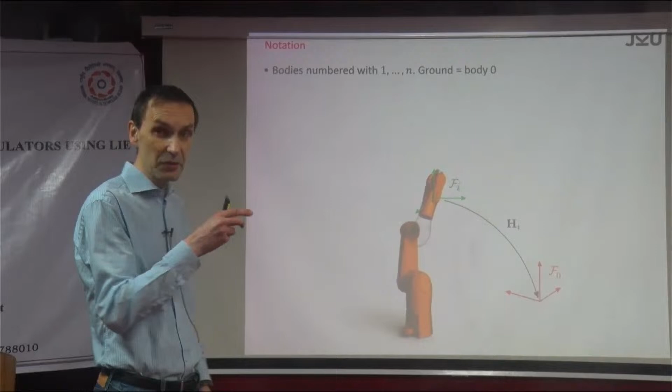Okay, good. Then let's go, without further ado, into what we are talking about. So, just remember, what was this matrix? How do we describe rigid body motions? In a sense, we're saying that any rigid body can be represented, kinematically at least, by a frame, right? Haha, because you haven't been here. Let's see. Take this as a recap, maybe.

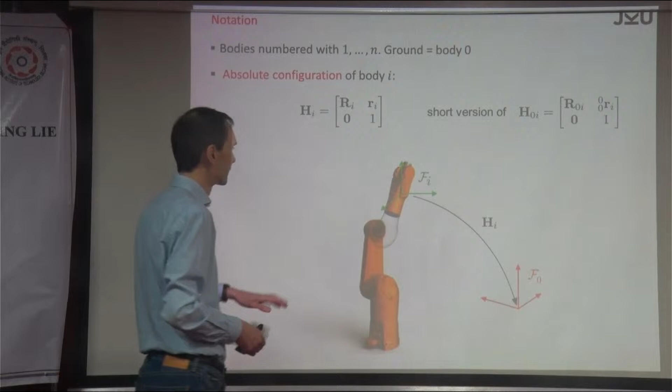So you know homogeneous matrices, right? Cool. And what is it doing? A homogeneous matrix transforms point coordinates, essentially. But on the other hand, it actually describes a 6D kind of transformation, because it says one frame relative to the other frame is translated somehow and oriented somehow. This is encoded in a rotation matrix and a displacement vector. I guess I don't have to recall this because you know this.

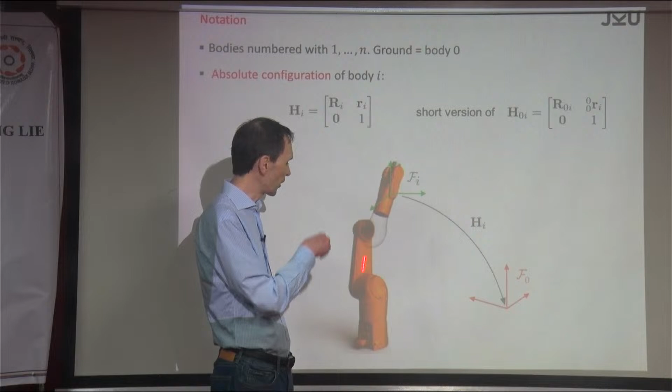Okay, so now let's say we have a robot, like an open kinematic chain for the time being. And what we're interested in is the last link. This was the last example we had yesterday. The forward kinematics, as they call it, says I would like to have the end effector. So here is an end effector frame. There is a frame attached to all of the links, but let's say this is the last one. In this case we have 6, so this would be F6, attached to the end effector here.

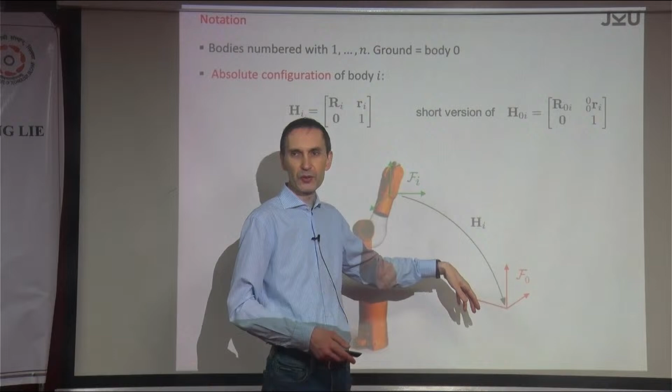And the question is, how is this end effector frame positioned relative to the world fixed frame? Because we have one frame that is fixed to the ground, and this is also link number 0, if you want. So this is the question. Of course we use a homogeneous matrix, and the notation we introduced yesterday is H. So H_JI, for example, is the transformation from I to J. For our case now, we are interested in what we call the absolute pose, and pose means position and orientation, right?

So the pose of a frame relative to the inertial frame. Whenever we refer to the inertial frame, which means that we have index 0 as the beginning, we just omit it because that's much easier. The 0 we can drop. It's always like this. Maybe notation, because you haven't been here yesterday at this time.

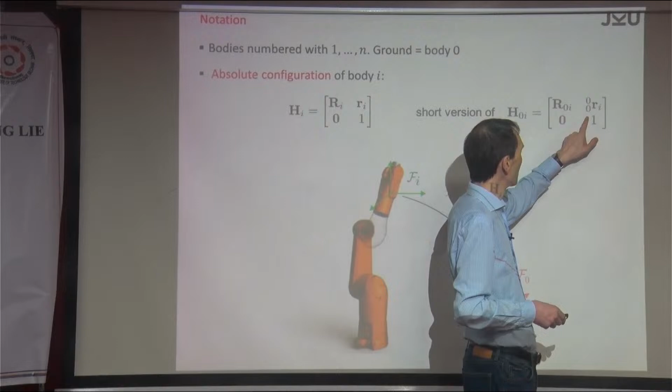The notation goes that we have a vector, right? And the vector measures from 0 to I. So this is the source and the target, okay? And then we have, of course, the leading superscript here, which is indicating the frame in which we are representing the vector. So this is essentially it.

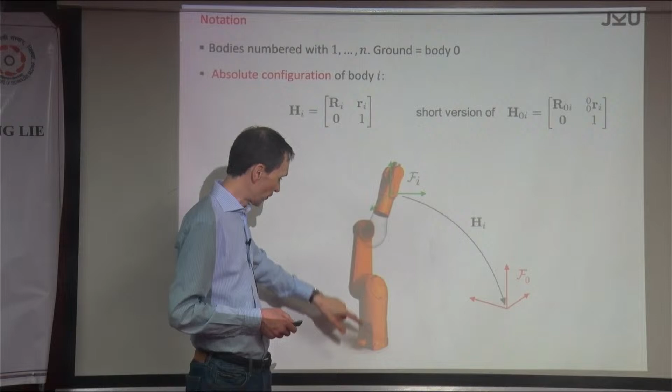Okay, now the question is, what can we do with these exponentials? And that's what we're going to look into today. First of all, we have to say something about relative configuration. So when you take one of these matrices, let's say I'm interested in the pose of link, I don't know, 3 relative to 2, for example, right? Or 6 relative to 2.

Then it's easy to do because essentially what you're doing, you combine these transformations. And maybe it's good to understand or to recall what it actually means. So what is Hj doing? Hj transforms, this was the definition, from frame J back to F0. Then Hi does, of course, the same, right? It goes from I to 0.

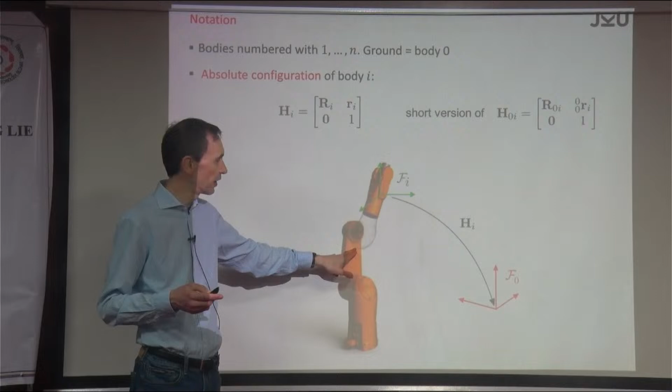Maybe we should have a picture of it. Hi goes from I to 0. Hj goes from J to 0. Now, in order to go from I to J, you just go from I to 0 and then back to J. And when I say go back, that means taking the inverse of the homogeneous transformation, okay? And that's exactly what we have here.

Now, if you go the other way around, from J to 0, from 0 to I, then you take exactly this. And always you have to read it from right to left. This is what I said for the rotations also, because you are transforming coordinates, right? This goes from J to 0, and that goes from 0 to I. So altogether it goes from J to I, okay?

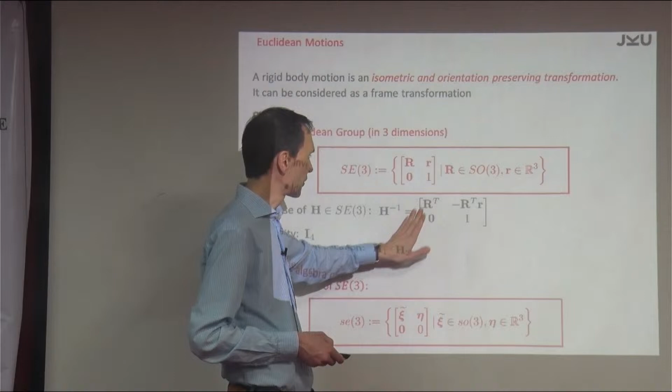So if you look at what we had yesterday, just to recall the inverse: the good thing is for these 4x4 homogeneous matrices, there's a closed form of the inverse, okay? And the inverse matrix looks like this. We have the transpose, minus this thing there. And if you now plug it into this formula, take the inverse and multiply these matrices, what you get is hopefully obvious, exactly what you would expect.

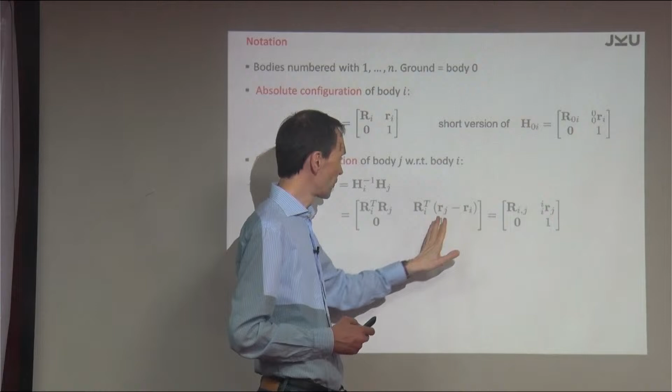What you get, for example, for the displacement is simply the vector from I to J, right? Represented in which frame? In the I frame, right? Because R0i transforms from I to 0, but the transpose goes from 0 to I. So these are expressed in the space fixed frame, and then you transform it back to the frame I.

And this is, of course, the relative rotation from J to I. So essentially, in Hij we have Rij, and of course, the displacement from I to J. Not complicated, I guess. So the important question now is, again, what about this exponential mapping? How can we use it?

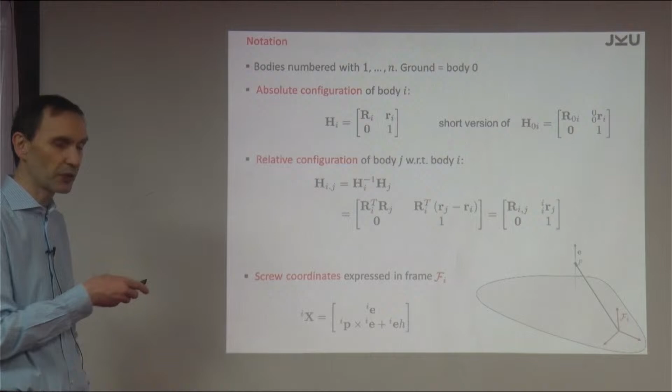What you could say is that, of course, there is a screw coordinate vector that represents this relative motion, because we had the Chasles–Mozzi theorem yesterday that says any rigid body motion is a screw motion, right?

And then we concluded that, okay, if this is so, then we can have a screw coordinate vector that we plug into the exponential so that we get finally out the relative motion, right? The finite motion we get via the exponential from this screw coordinate. Okay, this was the justification.

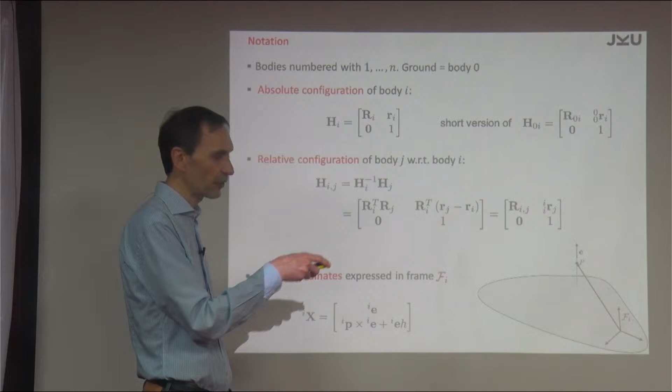And now the screw coordinate always has a form like this, right? So, just to repeat it, we have this unit vector that goes along the screw axis, and yet we don't know the screw axis, but there's always a screw axis. So again, this is the unit vector that goes along the screw axis, and then we need a position vector, a vector to a point on the axis, and it could be any point.

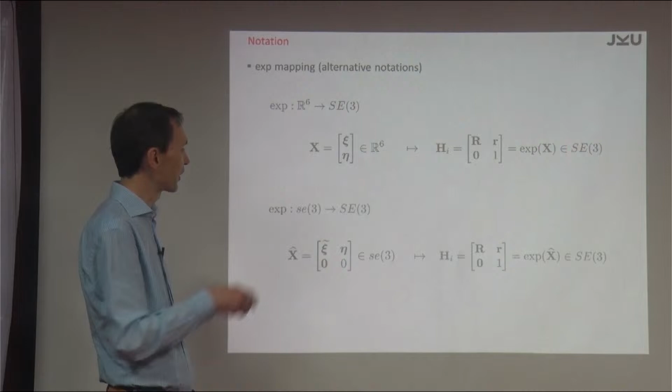And if you plug this into the exponential, what we get is the motion of the frame relative to which we are measuring actually the screw coordinate, right? So this was the basic idea. And how we did it actually, so these are the screw coordinates. So if you call this xi and this eta just for simplicity, then you get out the homogeneous matrix by plugging it into the exponential. Okay, this is good. So now be more specific.

And I guess I have to maybe increase the size. That should be okay.

So it's bigger. Okay, so let's now look at our systems. We have a kinematic chain, right? So a kinematic chain is essentially, as we defined it yesterday when we looked at the topology, a sequence of links or bodies connected by joints. And look at this very simple example. It's always the best example. Have a revolute joint, for example. So we have body i minus 1 and body i. They are connected by joint i.

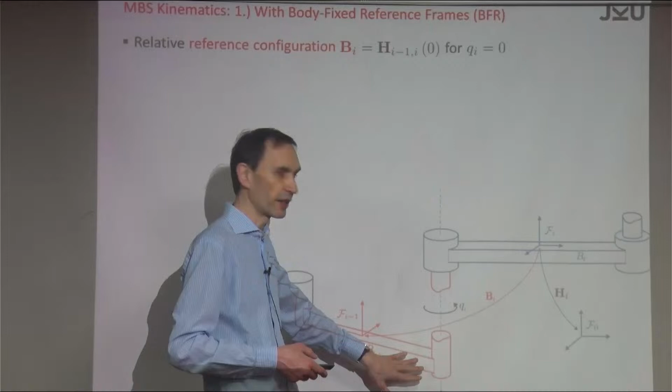It's always like this, because when you have an open kinematic chain, you can number them starting from 0 for the ground, and then 1, 2, 3 to n, and then link i is connected to its predecessor by joint i. You can always number them. That's why body i is connected to its predecessor by joint i. Okay. Anyway, so what can we do?

As we said, any link, any rigid body is kinematically represented by a frame. So we are attaching a frame. So Fi is actually representing the body i. And of course, you have the same on the body i minus 1. This is the blue one, this is the red one. So this is the predecessor of Fi. I'm interested in, as we say, the absolute pose, which is Hi, the homogeneous matrix that tells you how this frame is positioned and oriented relative to the spatial frame, which we call the pose of the body. And this is Hi.

Now I'd like to express this in terms of an exponential. I know that this is a revolute joint, for example, or it could be any joint. Not any, but we are going to see which one. But for all of the technical joints, we can have an exponential mapping.

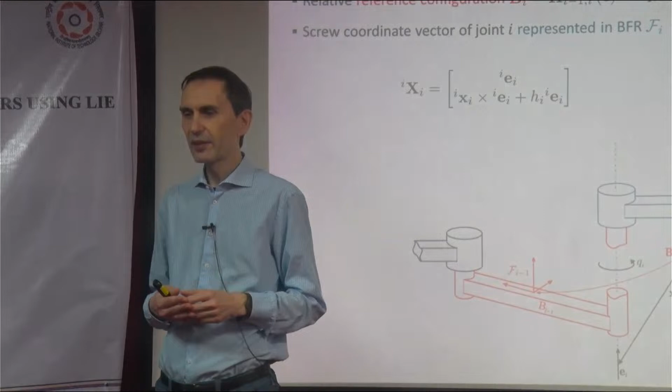Yesterday, I owed you one formula because there was a question by you, I guess. What if you have a prismatic joint? Then we said, mathematically, this is an infinite pitch. But the formula looks different for the exponential. It actually looks much simpler. Anyway, this is what I still have to show you. So this is the general thing, and that's it. Good, fine.

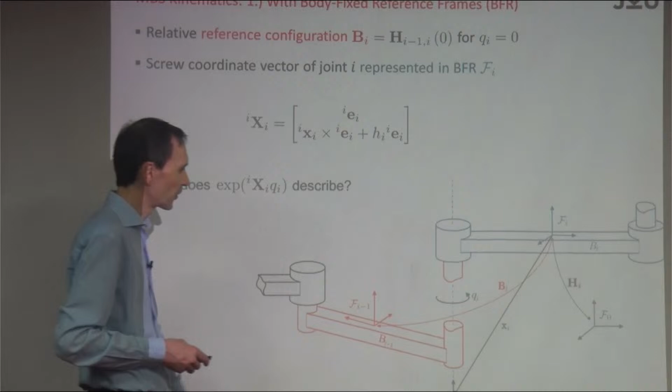And what? I plug it into the exponential, but if I plug this into the exponential, what does it actually describe? What does the exponential of this screw coordinate tell us? First of all, look at this one. I didn't talk about this. What is the exponential of the screw coordinate defined in this way telling you? So when we introduced the exponential mapping, do we have it somewhere? Maybe from yesterday? Yeah, maybe it's here.

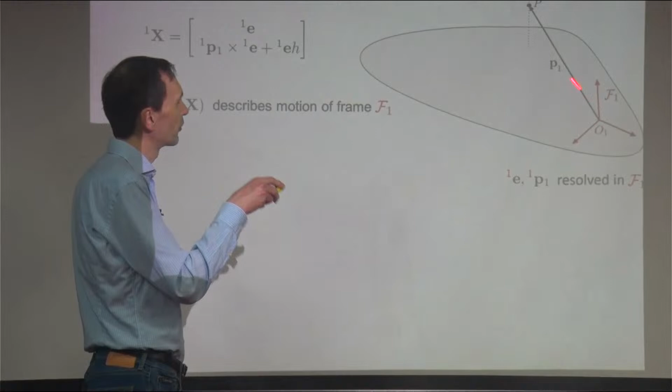So there was one question yesterday. We have two frames, right? And I tried to describe the relative pose of the two frames by using an exponential. But essentially, it's only one frame that we're looking at. Why? Because this was how we introduced it yesterday. You have one body, one frame, and we're interested in the motion of that particular frame. And we know it's a screw motion because any motion is a screw motion. So there is a screw axis and so on. All this was already told.

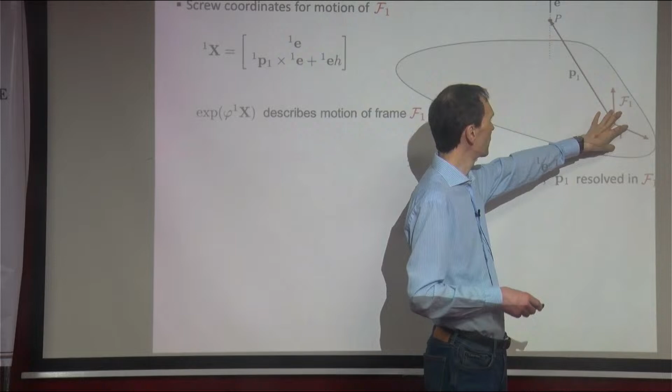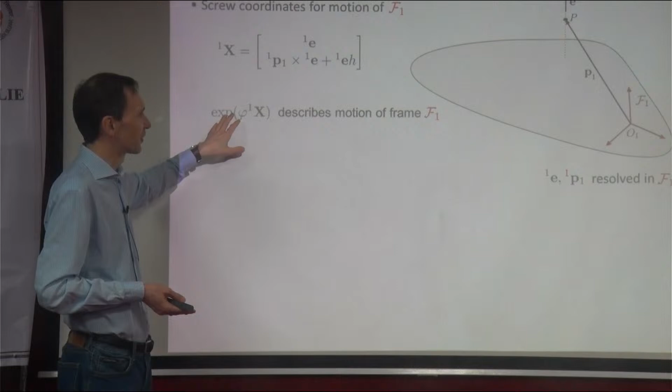But what is the exponential giving you? It's actually describing how this frame is displaced, how this frame is moving according to the screw motion relative to where it started from. So that's why we essentially have one frame, but there are two instances. And obviously, what is the exponential of the argument 0? Well, it's the identity, right? So if you call phi the angle, this frame F1 is exactly located where we start from. Now, if you start doing the screw motion, then it displaces.

And what we're getting is the homogeneous matrix. This X gives you the homogeneous matrix that describes the pose. Imagine this is now rotated, so it's somewhere here. And this H actually describes how you transform from the displaced one to the original one. So essentially, look at the frame, define screw coordinates, plug it into the exponential, and what you get out is the homogeneous matrix that transforms from the current back to the original. And that's the only thing you have to understand.

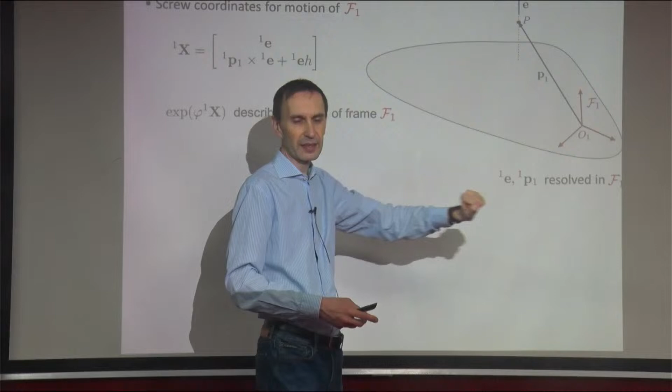And this probably answers this question here. What does this exponential describe? It describes the motion of this frame, which we're interested in, but not relative to its predecessor. It describes the relative motion to where it started from. So let's say this revolute joint starts to turn, and if it's positive, it goes somewhere in the back, and then the exponential tells you the homogeneous matrix that transforms from the displaced one back to the original one.

Okay, good. But this is not what I wanted. What I wanted is actually the displacement from here to here, or the other way around. But that's easily done because I just have to pre-multiply it, right? Because this is how the BI comes in. The BI is again a homogeneous transformation matrix that is transforming from, let's say, what they call the zero reference configuration.

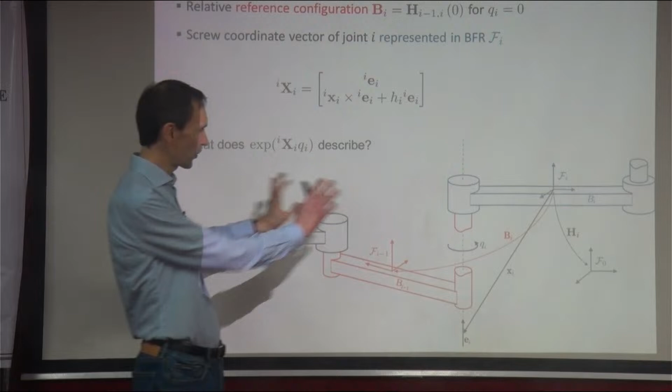This is our snapshot of, or let's say, the CAD drawing, for example, if you have your drawing of a robot or something, right? This is your reference configuration. You say, okay, this is when Q is 0, all the joint angles are supposed to be zeros like this, then this is the reference configuration. So in this reference configuration, you can define this B. This is constant because it's reference, right? Zero reference. The B describes Fi relative to Fi minus 1 in the zero reference configuration.

Okay, that's nice because then the only thing you have to do, you have to transform. Yeah, it would be nice to write actually, because if this joint has been moving, this is displaced somewhere, right? And just imagine, so this is displaced somewhere. So the only thing you have to do, you have to combine the transformation from the displaced one to the original one, the reference, and then of course from the reference to the predecessor. And that's all you have to do, right? And that's why the only thing that you have to do is probably to combine them.

So if I want to go, look at the last one. If I want to go from Fi to Fi minus 1, then eventually the final relation that you have is this exponential that tells you how this guy is actually moving relative to where it started from. And then followed by the constant transformation due to the initial displacement of Fi minus 1 and Fi. And this is the Bi, okay? So this is essentially this one.

Now, if you have a long chain, you have the chain consisting of, I don't know, I bodies in this case, or I joints, then you do the same. So this is this, and then the same applies, of course, to the predecessor, Fi minus 2, right? So the same story goes. And then you go up to the first one, and that's it, okay? And there we go. And that is actually the so-called product of exponential formula for the kinematic chain. And that's a famous formula that goes back to Brockett, and you find this in all these kind of modern robotics books and so on.

As I was saying yesterday, first of all, this is a nice expression because it's very compact. Secondly, the parameterization is pretty simple. We talked about the DH parameters yesterday. The DH parameters are as they are. They're kind of complicated because you are restricted to a certain notation, to a certain convention. Okay, but what do you need here? So if you believe me that this makes sense, then what parameters do you need to parameterize the system?

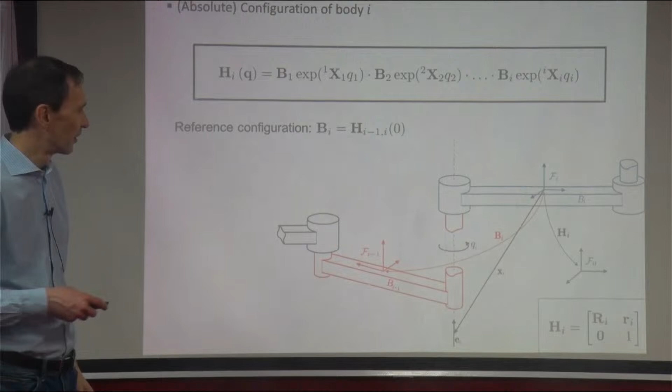Instead of the DH parameters, for example, the only things that you need is exactly what goes into the screw coordinates, which means you have this xi and you have the unit vector. And that is something that you can easily define, or that you can easily measure, because when you have a robot, you know the axis, right? And that's it. You have to know the joint axis, and then you get the unit vector, and then you can easily measure a point on it. And that could be any point. I'll give you an example later on.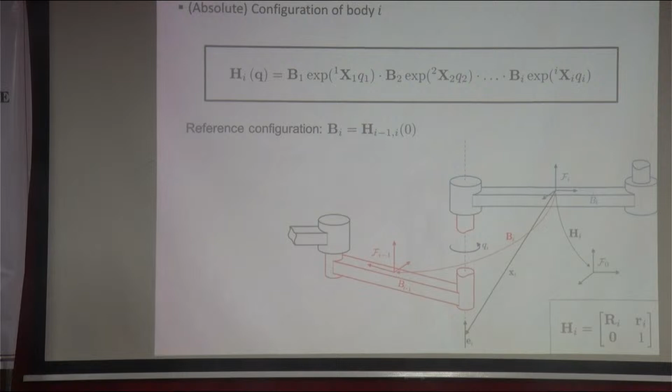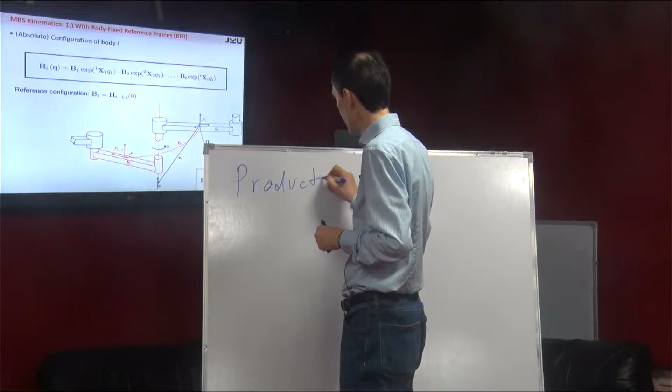Okay, so now we are here, probably too fast, but anyway, this is a high-speed introduction to this. And this is a formula that you find as the product of exponentials. I should have this mentioned somewhere actually, because this is an important name, because when you go to any of these robotics conferences or look at these books, this is what you find. So it's called the product of exponentials. And this goes back to Roger Brockett, who is a kind of famous roboticist. Exponentials. And it's always abbreviated as POE.

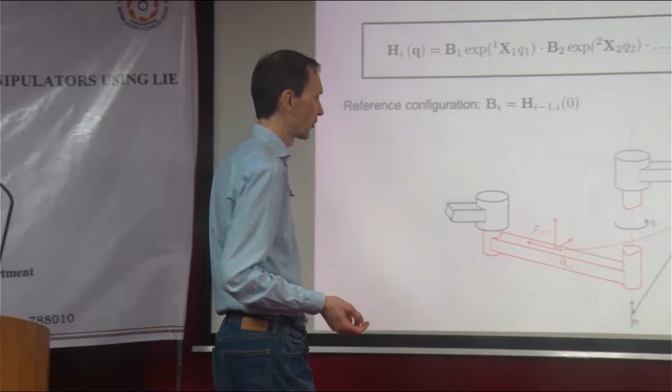So if you search for POE, you find a lot of papers working on so-called POE formulations. And the good thing is that you can use it for calibration, for example, for identification, right? Because robot calibration, what is it all about? It's about identifying these parameters correctly, because if you buy a robot, you have certain DH parameters, for example, or certain geometric parameters, but of course the system that you bought is not perfectly like this. So you have to identify, you have to calibrate these systems, and this formula is also helpful in this. Why?

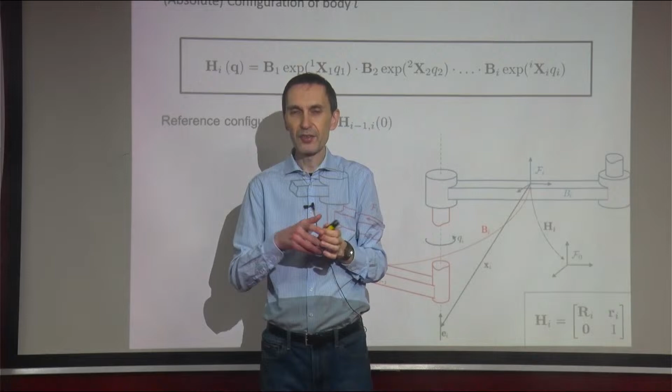Because what is it then? I mean, what does calibration mean? You're interested in sensitivity. You're interested in how actually this formula would change if you slightly change these parameters. It's always like sensitivities, right? Sensitivity: you have a function, or some relation, and you are interested in how sensitive that function is to changes of the parameters. And what do you do? You take the derivative, like a total derivative, right? Like this.

And now the good thing is, and this is what I said yesterday, what's the good thing? Why are people in system theory so keen on using exponentials for solutions of differential equations? Because taking the derivative is pretty simple. If you take the derivative of this formula with respect to q1, for example, what do you get? You get the exponential again, because exponentials, if you take derivatives, they repeat, right? We will see this when we go. Okay.

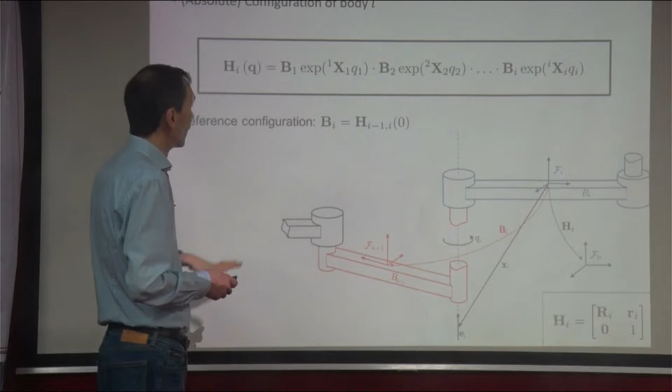Okay, so messages. This is, first of all, a compact form. This product of exponentials is very compact. And secondly, the parameterization is straightforward, because it's also called a vectorial representation, because you only need vectors e and x instead of super complicated DH parameters that you have to introduce and so on. But we can make it even better, in the sense that we can actually get rid of the need of introducing body fixed frames.

And how does this go? Essentially by saying, screw theory is coordinate invariant. That means that you can actually use any frame to express screws. And why don't we do this? Why don't we just say, okay, I'm actually using the space-fixed inertia frame to define the screw of the joint. It's the same, right? So what did we do before? Before we said we are defining the screw coordinates relative to the body fixed frame, because I'm interested in the motion of the body fixed frame. Okay, that's one way of doing it.

But we can also say, let's introduce the screw coordinates relative to the space fixed frame. Sounds a bit strange at the beginning, but why not? So just do it. You have the unit vector again. It's all the same concept, just a different reference frame. So now the unit vector and the displacement vector, the vector to a point at the axis, now we call it y. Before it was x, now it's y. And you measure this again relative to a space fixed frame in the reference configuration, where everything is 0, you measure the point and the unit vector relative to the space fixed frame.

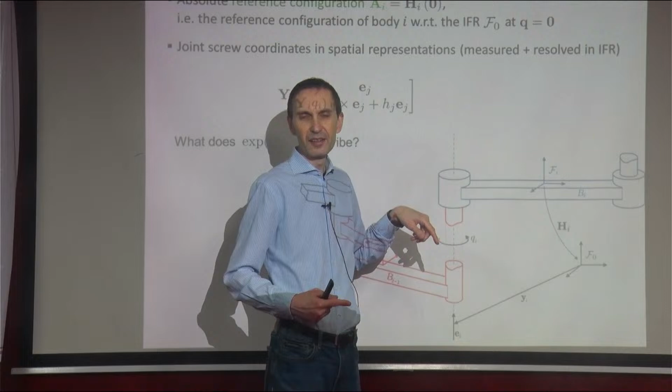It's correct anyway. So the correct sentence would be, it tells you how a copy of the inertia frame would be moving, right? And that's interesting, because you just have a frame, and then we say, okay, what happens if we have a screw motion? How would this frame be moving? And that is exactly what it tells you. It tells you how a copy of this inertia frame, this space fixed frame, would be moving.

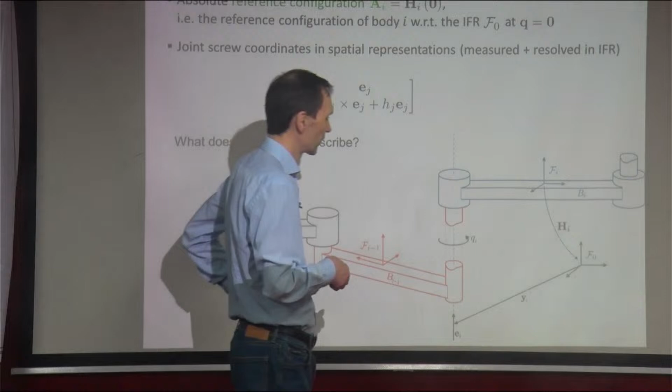Okay, that's nice. But how does it help me to actually say anything about the kinematic chain? Well, it's the same story, because the only thing you have to say is, okay, I have to relate that relative motion to my zero reference configuration. And that's all you need. And oops, how was it going? And yeah, we didn't have this yet. And that's exactly what you do.

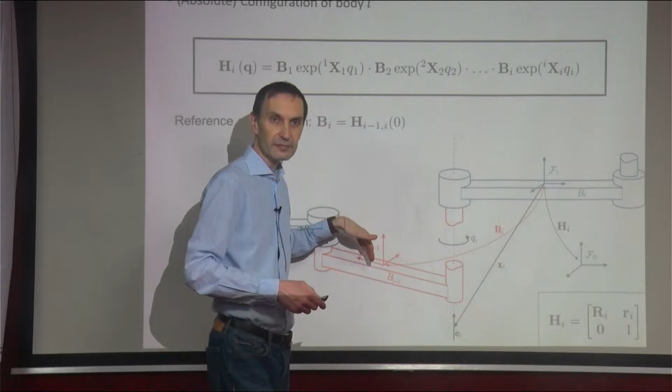Now what you do, you combine all these motions of the joints, because now you don't have an intermediate as we had here. You don't have an intermediate kind of fixed displacement, because everything is now relative to the space fixed frame. That's why you just combine them, and you can just multiply them together.

So if you start with i, the motion of this frame is according to this joint, the exponential of Yi. Then, because it's all referring to the same frame, you can just multiply it. Then the joint i minus 1 is doing something, in particular the exponential of Yi minus 1, and then you go up to Y1, and that's it. So then you have essentially described what happens to the inertial frame due to the motion of all the joints.

Eventually, I'm not interested in the motion of the inertial frame. So I finally have to relate that motion to what I'm interested in, the motion of this frame. And that's pretty simply done, because I know how this guy is moving because of all the joint motions. But what I have to do before is relate it to the initial pose of Fi. I take this Hi at the beginning, Hi0, and I call it Ai. So Ai is the absolute initial reference configuration.

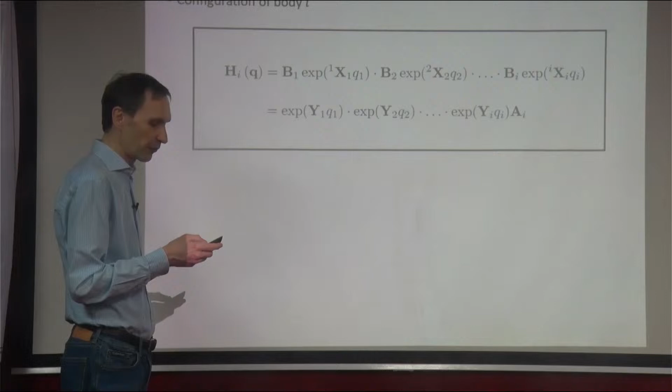And there's of course one application for this when you look into the forward kinematics of a robot. So what's the forward kinematics of a robot? The forward kinematics is essentially saying, I give you the joint parameters, like the joint angles, and I would like to know the pose of the terminal frame, the last one of the robot. And you don't need all these body fixed frames because they don't appear in the formulation here. That's why people use it for the forward kinematics very often.

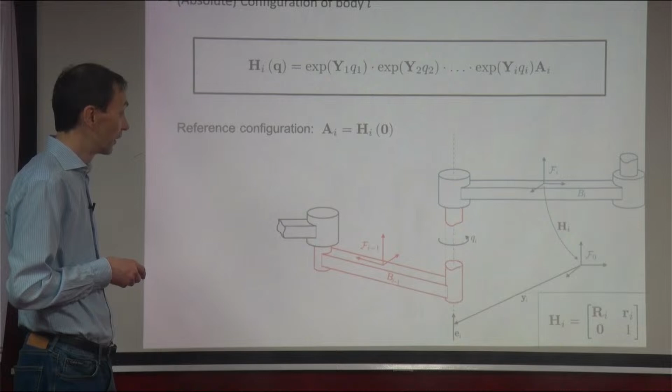Okay, now I had this simple example of a revolute joint, which is always good to analyze, or let's say a screw joint because it could have a nonzero pitch. But generally you have other joints. You have universal joints, Hooke joints, spherical joints like ball socket joints. There are planar joints. And you can of course generalize this because the screw coordinates can be combined. You can have multiple screw coordinates for a joint with multiple degrees of freedom.

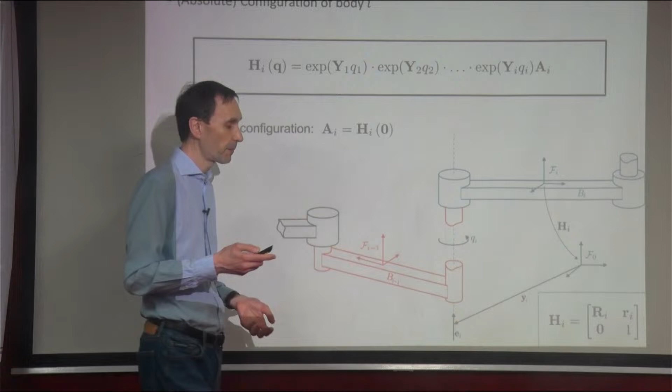And how do you do this? And for which joints does it actually work? There's a name, lower pair joints. I'm not sure if you mechanical engineers have heard about it. Aha, good. So a lower pair joint, also called a Reuleaux pair. Reuleaux sounds French, but he was a German kinematician. And for all these lower pairs, you can express the joint motion as a screw motion.

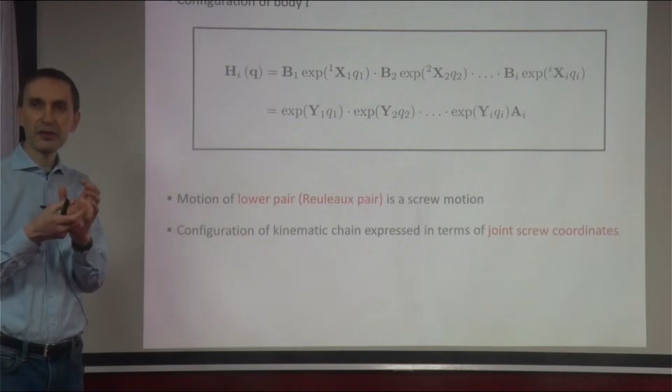Yes, this is what I was saying. Actually, what is a Reuleaux pair? What's a lower pair? A lower pair is very simple. It's a kinematic joint. What's this? Come on. Where am I? A lower pair.

I don't see any. Do we have a definition here? Features to blah blah blah. Yeah, so a lower pair. There we go. A lower pair is actually a joint that is defined by surface contact. Right? So surface contact, like a revolute joint. A revolute joint is defined by surface contact. You have a cylinder, you have a hollow cylinder, and they have surface contact.

Then you have the prismatic joint. It can look like this. Then you have this, they call it cylindrical joint, because this is 1 degree of freedom, right? That's a prismatic joint, 1 degree of freedom. The cylindrical joint is a combination of both, right? So you can slide and you can rotate. And again, this is surface contact. And then you have the ball and socket or spherical joint. Again, you have a surface contact. Everything is defined by a surface contact.

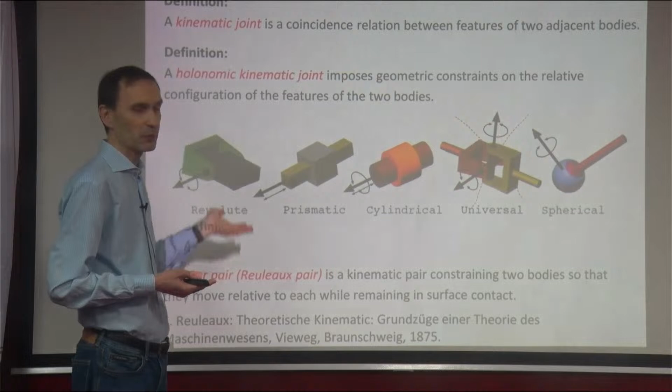A universal joint is different. That's why it's not a lower pair. A universal joint is a combination of two lower pairs, of two revolute joints, but it's not a lower pair itself, right? Because it's not defined by surface contact. It's just a combination of two revolute joints. But why I'm telling you this is because for all these lower pairs, we can use the exponential, the screw coordinates, to formulate the motion.

For the universal joint, we cannot do this explicitly, but we can, of course, do it because we can just combine a revolute joint with a revolute joint. So we can still use it. But if you just take this joint as such, we cannot introduce screw coordinates, but we can introduce screw coordinates for the revolute joints and then combine them. Okay, yeah, exactly. This is, again, some pictures: revolute joint, and so on.

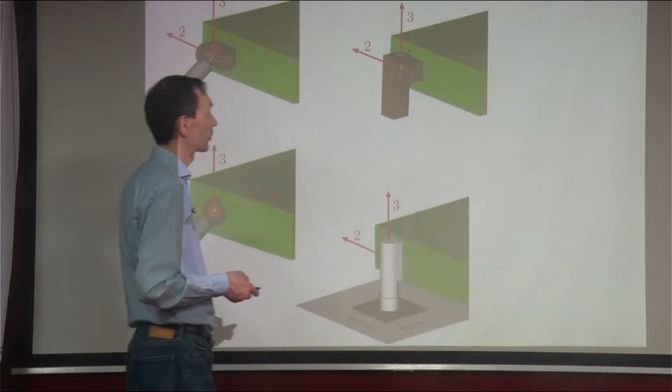Yeah, and there are more joints, of course. There is, as I mentioned, this planar joint, for example. So you can have planar translation and a rotation about the vertical axis. And of course, this, for example, doesn't work because it's not a lower pair, because it's not defined by surface contact. You see, this is the difference. This is not defined by surface contact. It's just a line contact in this case.

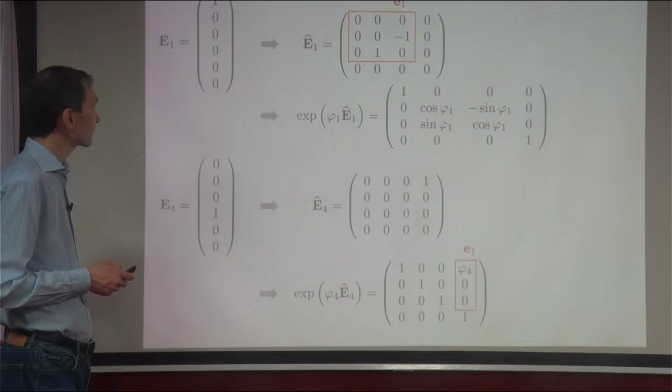Yeah, and for all these things, we have so-called subgroups, right? I'm not going into detail here. When I say subgroups, yesterday, maybe a little bit. So what did we say yesterday? Maybe it makes sense to go to this slide here. We said actually that these homogeneous matrices form a group, right? Because you multiply them, and what you get is always the same kind of thing. What if you, for example, have rotations that are 1 degree of freedom rotations, like planar rotations, so about one single axis? If you again combine them, what you get is again a rotation about the same axis.

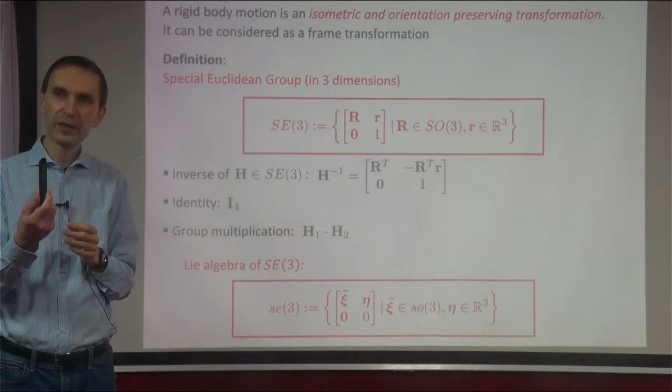So what you define in this way is a subgroup, in the sense that the spatial rotations are the full, as we call them, SO3, the full three-dimensional group. But if you restrict it to rotations about one axis, then you define a one-parameter subgroup, right? And that is something interesting because for those subgroups, we can define exponential mappings and use them for describing these lower pair joints. Yeah, there's much more theory behind it which we are probably not interested in.

Oh, I don't know what I'm doing. I always make this mistake with this. There's a shortcut which I don't know, but I apparently use it. Yeah, there we go. Right.

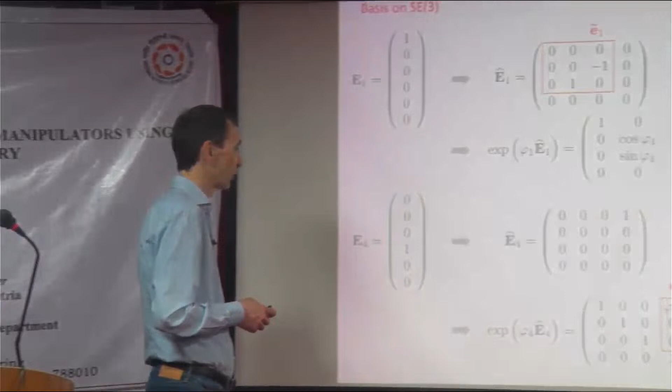Okay. Yeah, so this is repeated from yesterday. Maybe we don't need it. Okay. Who did understand what I'm saying? I know it's not easy to get at first sight, and it's good to repeat it again and again. And maybe it's good to really look into what happens joint by joint.

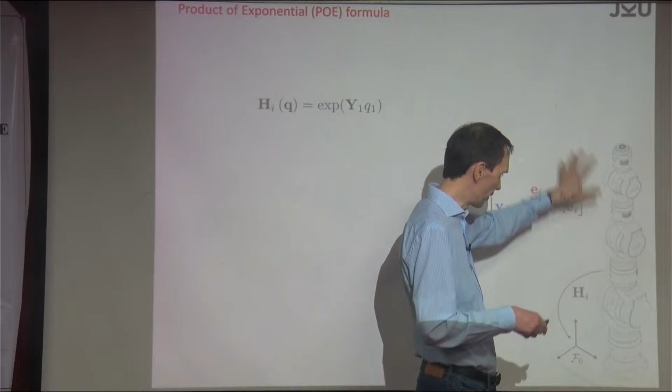So I was saying that actually the only thing you need, so let's say we want to have the homogeneous matrix of link i somewhere in the kinematic chain, and to express it by our famous product of exponentials formula. And I was saying that the only thing we need is this q coordinate. And then we plug it in here, and then we get something out.

I mean, so HI would be the combination of the first one, and then the second one, and so on. And this is what you believed me. I mean, at least you didn't object. But let's make it a bit more concrete. Also, maybe as a summary, before we make it concrete, what are the ingredients? What do you really need for doing this?

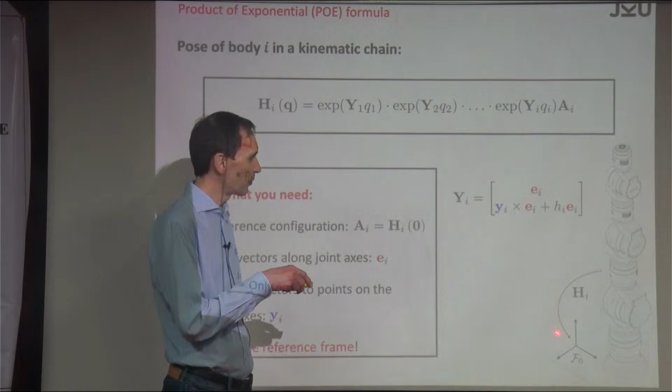You need only vectors again. You need just a vector to the joint axis. So you measure from here a point on a joint axis. That's easily done. And you need unit vectors along the joint axis. That's also what you easily can do. And the only thing additionally is that you need the initial pose of the frame that you're interested in, which is also not difficult. But let's do this for an example.

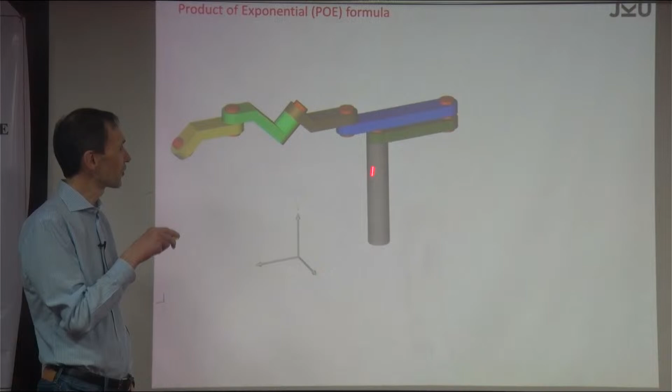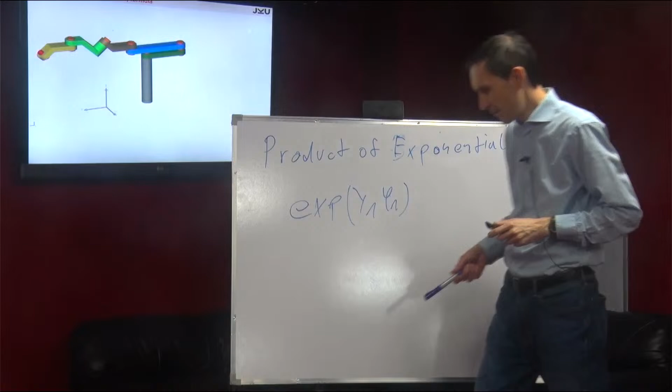Right. Okay. Number one, what's the consequence of moving the first joint? So we have 1, 2, 3, 4, 5 joints. So what happens if you move joint 1? And before you answer, I'm asking, what is the exponential? What is this y1? How do we call it? Phi1 maybe. What's the consequence of this first exponential? Well, first of all, you have to maybe repeat your answer that you didn't give me, but I gave it to you. What is this exponential doing?

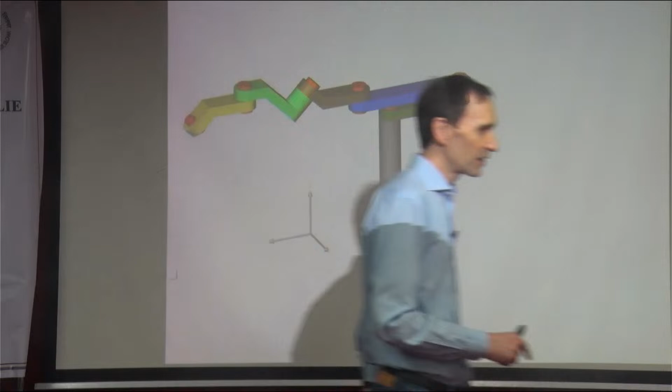That's absolutely right, but this is not specific. Of course, it's transforming a frame because it's a frame transformation. It's obvious. I mean, it's all here. The only question you have to ask when you have this exponential, you only have to look at the argument. What goes into the exponential? It's this y1. So now, what is y1?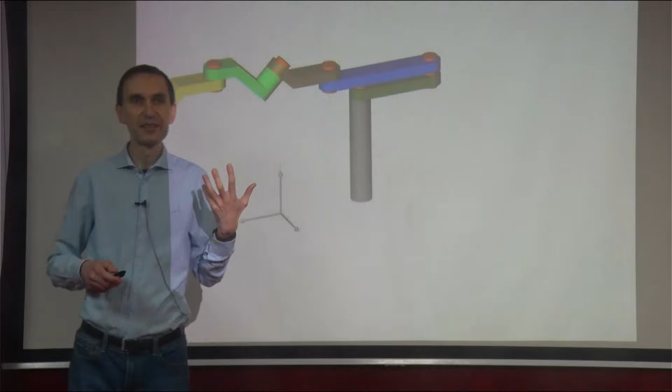Y1 is this screw coordinate expressed in the space fixed frame. So it tells you about the motion of a copy of the space fixed frame due to the motion of joint 1. So this is my space fixed frame. So I'm expressing all these screw coordinates of the 5 joints relative to the space fixed frame. So what's happening when I move joint number 1? Huh? Yep, I guess you are right. So it's doing like this.

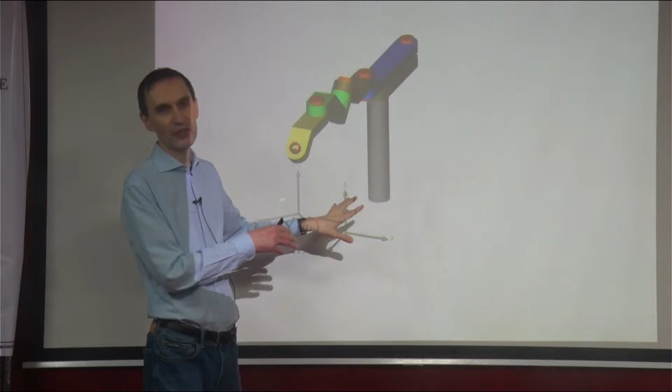Is that so? Yeah. So the green one, actually, you're right, but not correctly, because you have been saying the space fixed frame is rotating. It's actually a copy of the space fixed frame, which is attached to the first link, the green one, right? That is moving. That's what you see. Okay. What about the second joint? What happens if I move this joint?

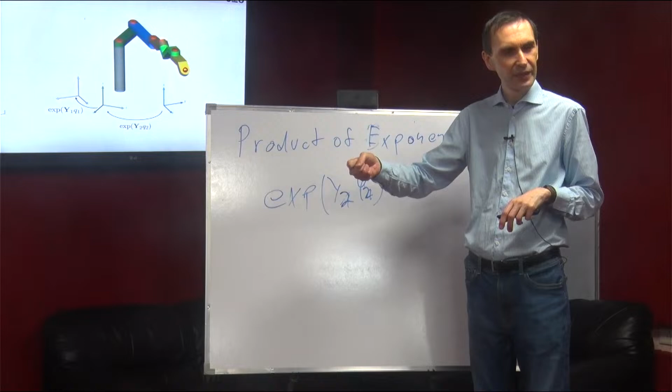Which one is rotating? So another copy of this frame. Okay. Right, exactly. But why is it correct? Because now we look at this second one, the second joint would be y2. But I've been saying that this screw coordinate is expressed in a space fixed frame, and the exponential would give you the motion of this space fixed frame due to the motion of joint 2. So why is it then moving the green one, not the gray one?

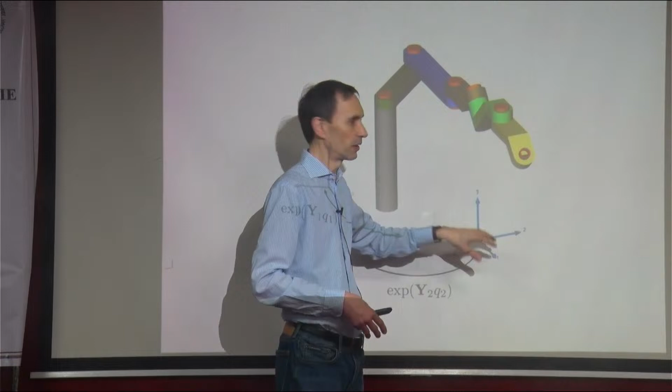With link one. Exactly. And that's the important point, because this is all relative, right? Because what we do, we combine these motions, right? Because essentially, to the second link on which the blue link at which the blue second frame is attached. To this body, the predecessor.

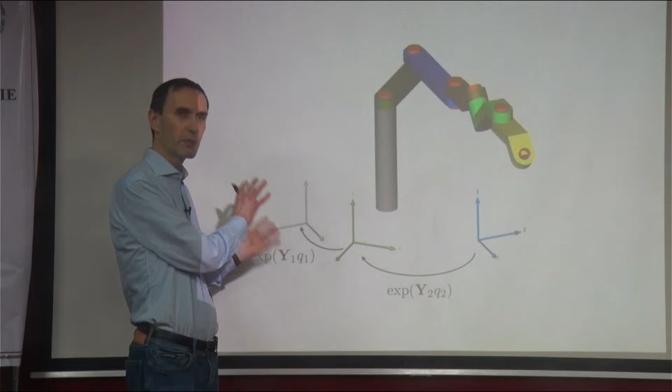Now, what I was saying is, okay. What I want to say is that for the blue body, okay? No, what I want to say. Now I got confused myself. When you define, this is what I'm going to say. When you define this screw coordinate of the second joint, you define them in the initial pose of the system, in which all the frames that are attached to all the bodies actually coincide with the inertial frame.

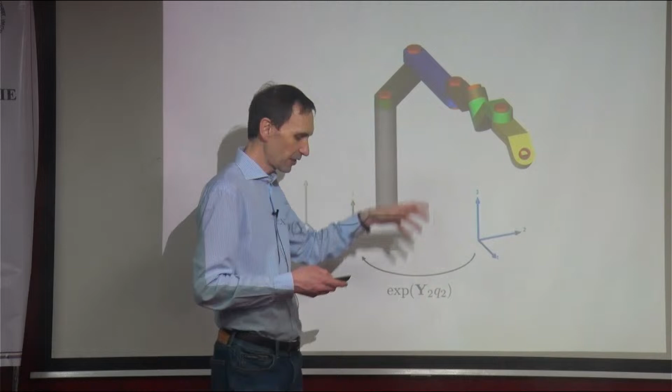And that's why, of course, all the exponentials are describing the relative motion of a copy of the inertial frame that is attached to the respective body, but it's the relative motion. Because for the blue one, the frame in which the co-coordinates are expressed is now the green frame, because the green frame was initially the one in which we expressed it, right? And that's why, exactly as you said, the blue one is moving relative to the green one, not relative to the gray one, because the green one now serves as the space fixed frame for the blue one.

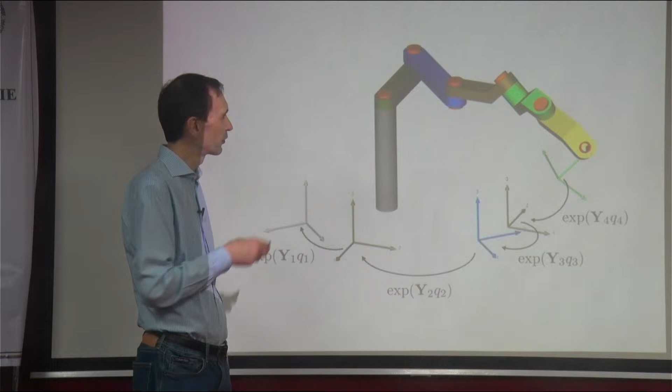Okay, now the question is, what happens to the whole system if the third joint is moving? And then I guess the answer is clear, because it's the motion of a copy attached to the brown link, the third one, relative to where it started from, right? And then you do the same, and then you have the motion due to the fourth joint, which is describing the motion of a frame attached to the fourth, the green one, relative to where it started from. Okay, what's next? There's one left. What happens if you move the last one? And of course, then you get the motion of a frame that is attached to this one.

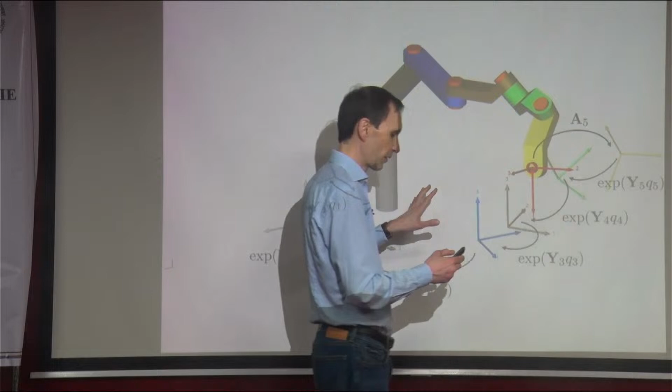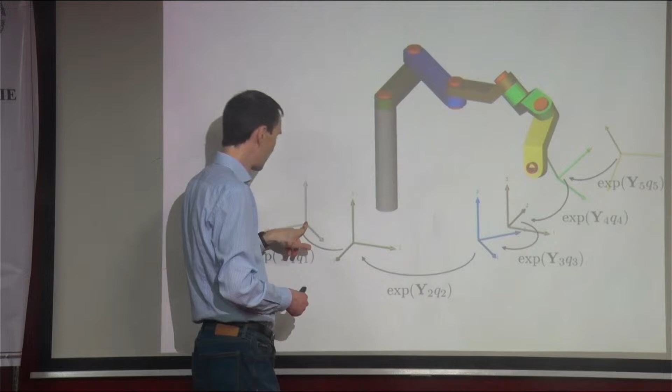Okay, this is all nice, because now we have described motions, and in particular relative motions of the space fixed frame due to the motion of the joints, which is not what I'm interested in, because I'm interested in the motion of my end effector here. That's why you just have to do a constant transformation. What did I get out of this Y5 times Y4 times and so on, this combination of motions? I get the motion of the frame attached at the yellow link that was initially coinciding with the space fixed frame, which is not what I'm interested in, but there's a constant offset.

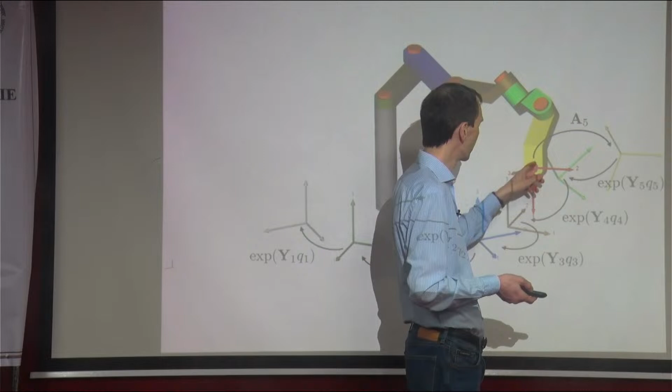There's a constant offset that tells me this frame that is initially coinciding with the space fixed frame is positioned relative to my end effector frame. Let's say the red one is the end effector frame, and there's a constant homogeneous matrix that we called A for absolute reference configuration of the last link, which is number 5. That's A5. So if you combine all of them, you get H5. So you go from here to here, which is A5. Then whatever happened because of the motion of link 5, which is the exponential here, and so on, and finally you get to here. So the pose of the red frame relative to the space fixed frame is this. Okay?

Okay, so are we up? Can you give me an idea about Y here? Can you help me to visualize the Y here? Oh, yes, I can, because this is what we have on the next slide. Yeah, we have it here. Y, you mean?

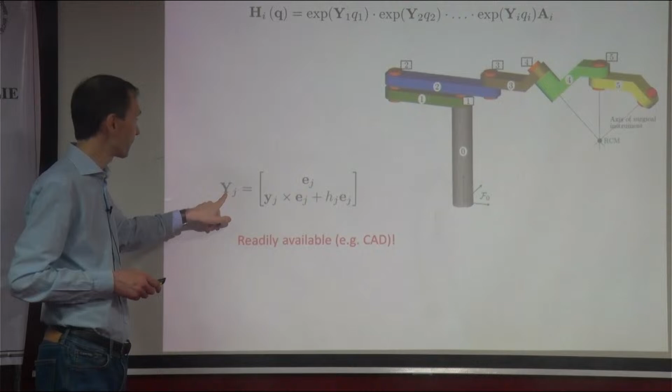Should we do it after the tea or before the tea? No, I'm asking because I'm not the master here. Yeah, so 5 minutes, 10 minutes break. Then we'll... yeah, exactly, because it's all here. But I guess he needs a tea. So, as per the schedule. Sure. Okay, then see you in 5 minutes, or 10 minutes.